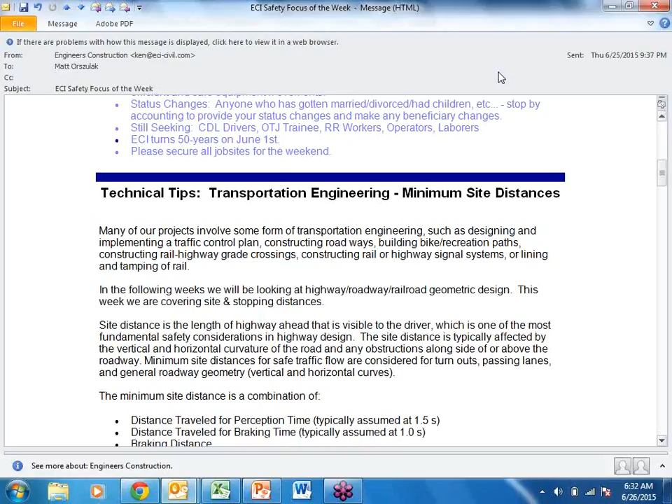ECI turned 50, and don't forget to secure your job sites, especially the holiday week next weekend.

For technical tips, we're changing gears here, away from EPSC measures. We went through all 13 items, so that carried us for quite a while. Now I thought we'd do some transportation engineering things.

Many of our projects involve some form of transportation engineering, such as designing and implementing traffic control plans, which we actually do from the design process to actually implementing it. This includes construction of roadways, building bike and recreation paths, constructing rail-highway grade crossings, constructing rail or highway signal systems, and lining and tamping of track and rail.

In the following weeks, we're going to look at highway, roadway, railway geometric design, starting with sight and stopping distances. Before I start, I'll say that just like highways were critical for curves and all kinds of geometric design, railroads were the ones where this mattered even more. Railroads are critical—you can't just lay out a set of tracks; you have to design it to the right geometry.

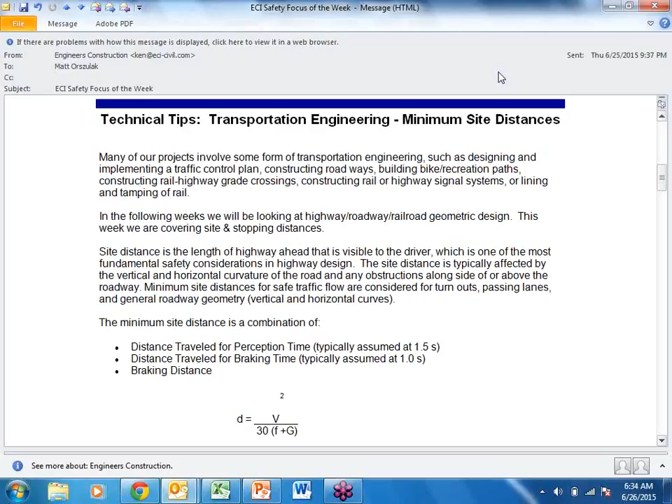Back in the old days with a horse and buggy, it didn't really matter much about all the geometric design we're talking about, like sight distances today. Sight distance didn't really matter in the old days when it was just a horse and buggy. Sight distance is the length of highway ahead that is visible to the driver, and it's obviously one of the most fundamental safety considerations in highway design.

Sight distance is typically affected by both a vertical curve and a horizontal curve of the roadway, and obstructions along the side or above—like if you're coming along a highway and drop below a bridge, you have a limited sight distance because of that. The minimum sight distances for safe traffic flow are considered for turnout areas, passing lanes, and general highway geometry.

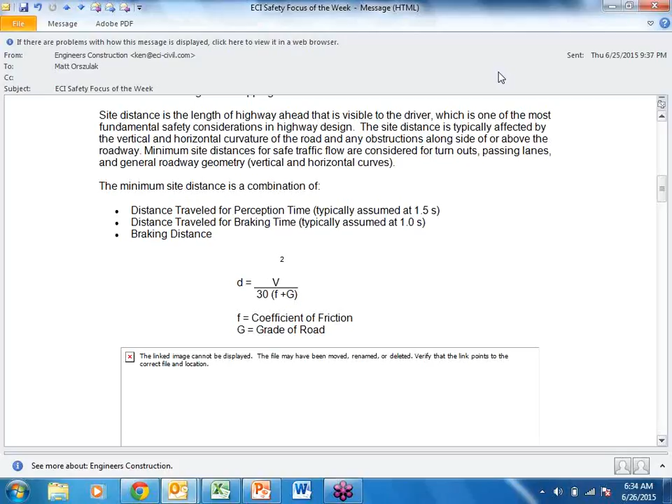It's a combination of three things, pretty obvious when you think about it—I'll have to get that image up. One is the distance traveled for the perception time: something jumps in front of you, a car pulls out in front of you, and you have those few moments to get your head around it and say, oh my God, there's something in the roadway, I've got to stop. Usually you're given a second and a half for design purposes.

Obviously it's on the high side. And then there's an actual time for hitting the brake and getting that reaction time. So there's a couple things combined: the human part, and then the braking part, which is the mechanical part for the vehicle stopping. The braking distance is the velocity or speed squared divided by 30 times F plus G.

F is the coefficient of friction between the rubber and the road, and G is the grade of the road. So if you go upgrade, obviously it helps. If you go downgrade, it makes it worse.

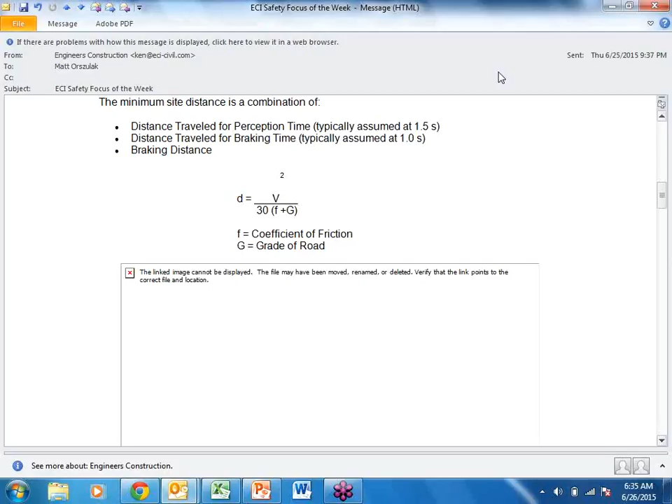Let me go back up to the top and get my... Well, perception might obviously change, your reaction time and seeing things, but probably not too much. One of the big effects is like wet surfaces on the roadway can have a big effect on friction.

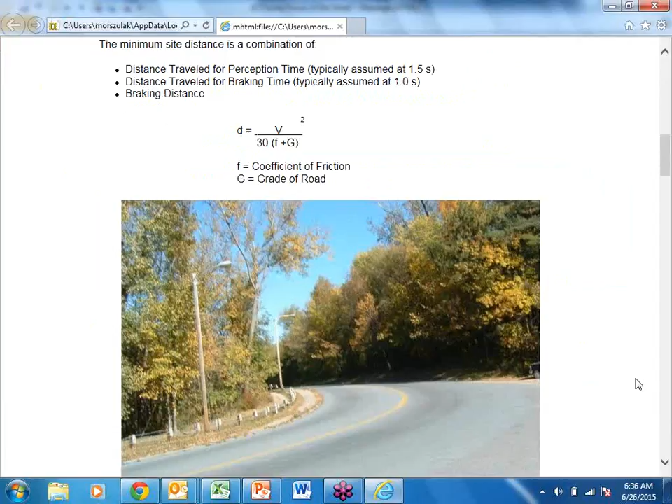There we go. There's my image, and obviously, kind of limited sight distance on a curve like this.

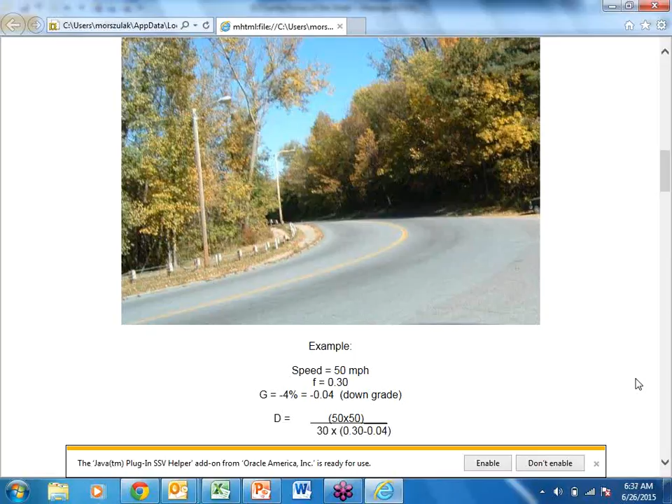Does anyone recognize that curve? Riverside Avenue. Yeah, like E&E is right off to the right, and then it comes out at the Winooski River Bridge. I think the image was taken back a ways, and I zoomed in on it, so it's kind of exaggerated.

Yeah, it's that corner there. That corner, actually, right around the corner is where I parked to go fishing in the salmon hole, and the path is right there. Oh, darn it, gave it away.

So anyway, I gave an example, 50 miles an hour. Typically, the friction is around 0.3 for a dry surface, and a downgrade of 4% or 0.04. You take all those numbers into account, it takes 320 feet to brake in that case, going 50 miles an hour. Plus you add some time, 2.5 seconds of travel time at 50 miles an hour before you even start the braking. That's 183 feet, so all combined, that's 503 feet.

So if you were designing a road and you had, say, a blind spot or something, you would try to keep it back. We actually got called on it, and it wasn't a problem. One of the traffic control plans we submitted for New Haven, for this rail project coming up to turn off from the roadway and onto the site, they questioned the sight distance. The process is to go through this, see what the actual measured distance is, and figure out whether the speeds are going to cause a problem.

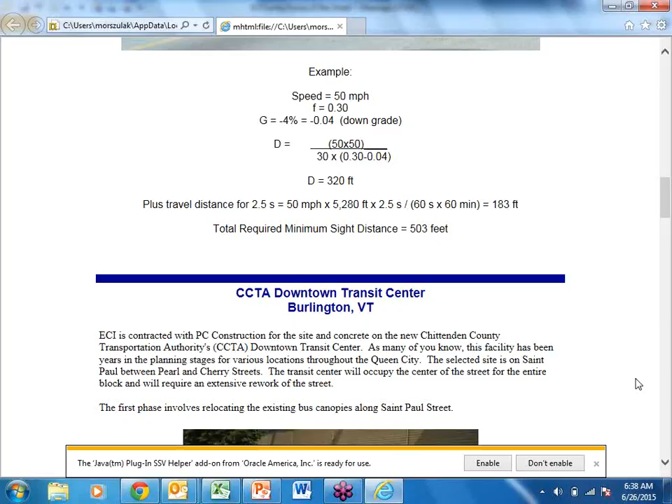And usually in a construction zone, you can also reduce the speed limit. Does that change any by having a heavier vehicle, like a car versus a tractor trailer?

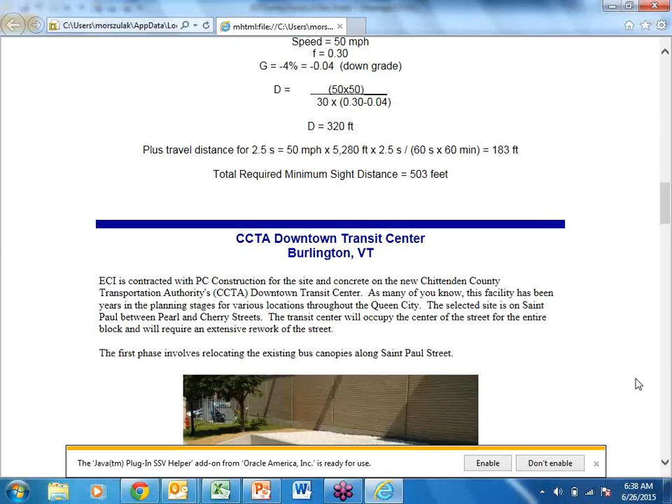It kind of would, but it's mostly a friction thing. So if you can get the actual brakes to lock up, say you're at that point, but obviously a heavy truck would go further. But also, with a heavy truck, he's sitting up higher, so his sight distance is usually greater. So it kind of makes up for that difference.

So for the project profile, we're going to talk about the CCTA Downtown Transit Center. We're contracted with PC Construction. They're the general contractor for the site concrete on the new Chittenden County Transportation Authority, the CCTA Downtown Transit Center.

As a lot of you know, this facility has been years in the planning. I don't know how long we've been hearing about this project going on. There's been numerous sites that they've looked at, and they finally selected a site on St. Paul, between Pearl Street to the north and Cherry Street to the south - one block length next to the big church there, in that square with the big bell tower.

It will occupy that whole street. When I first heard about the job, I happened to be down there and thought, I don't see how they could do it. They got buildings on the east side, a park and a church on the west. Then I looked at the drawings and realized, wow, they're really going to occupy that street.

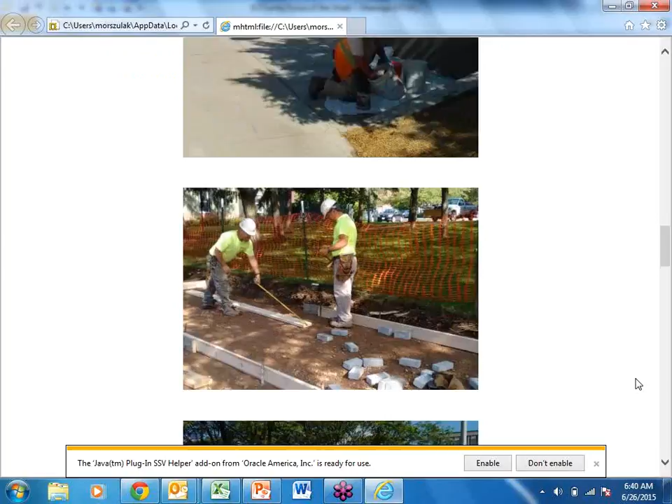One of the first stages is to relocate all the facilities on that section now, which are CCTA bus canopies. They'll have to get relocated so we can occupy the street. That's one of the first steps we're working on.

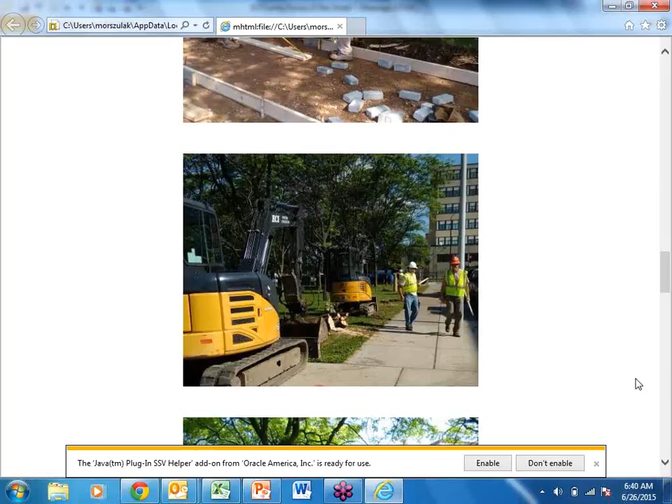This is from about Cherry Street looking north. There's the federal building on Pearl Street, and the big church with the steeples or bell towers. Right now there's all these canopies set up for the bus stop, where the buses are staged and people get on. But now all that's getting relocated while we do our work.

It's going to be a little odd, the traffic pattern. Southbound traffic is going to be on the right side looking at it, so it's flipped around. It'll be a little odd. The job runs through 2016 before it's open. We'll still be working in 2016, but in a different phase. Once they get relocated, they'll start the earthwork, ripping and tearing and digging down, then concrete up, because there's a basement level in this thing too.

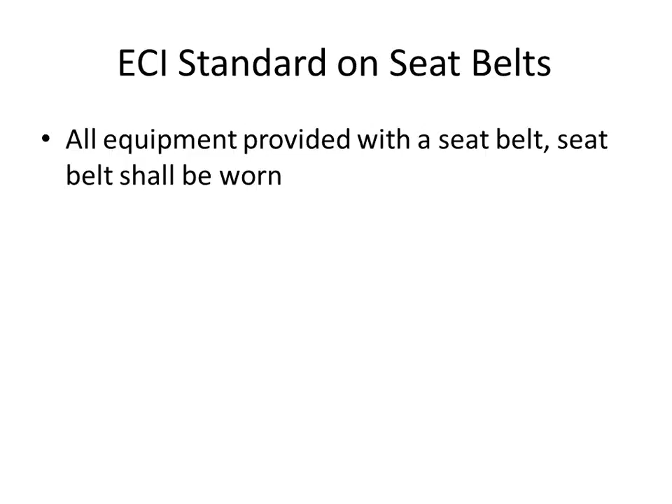We really do it for your own benefit, because if something happens, you might roll over, and the seatbelt is meant to keep you in that rollover cage. If you don't have that seatbelt and something happens, you could get crushed between the ground and the rollover cage. So it's important - it's a state and federal law to have your seatbelt on at all times.

In the state of Vermont, on the roadways, it's a secondary law for everyone non-CDL - they cannot pull you over just for not having a seatbelt, but when they do catch you, they'll hit you with a fine. For CDL drivers, it's a primary offense violation. If they see you without a seatbelt, they'll pull you over and write you a hefty ticket, and sometimes even add points to your license.

So again, it's a good reminder for everybody out there on the roadway. We see it very often, even just driving around here, and it makes me think, wait, if they're not wearing their seatbelt around here, what are they doing out on the main roads? I know sometimes you're just going from here to the backyard, but still, it's that habit we'd like you to get into - just always wearing your seatbelt 24/7.

With heavy equipment, if a piece of equipment does not have rollover protection, a seatbelt is not required. I know that gets confusing because we have some rollers out there that don't have a seatbelt. The reason is if something happens, you can actually bail out since there's no rollover protection there. There aren't a lot of pieces of equipment like that. So if rollover protection is available - which it is on pretty much all our equipment, other than maybe those old rollers - then you've got to have a seatbelt on.

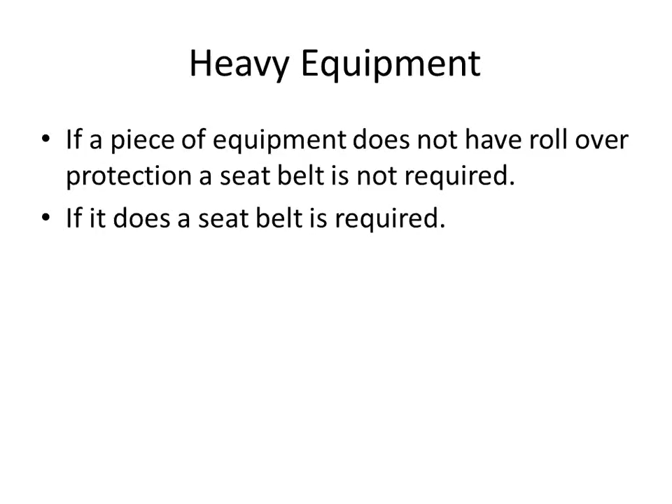Same thing goes for all the forklifts and everything. Those are some of the most dangerous equipment we have, these little Toyota forklifts. They tip over very easily, and if you're not wearing your seatbelt, there's a chance you exit your seat and the rollover protection ends up crushing you. That's why it's important to wear those seatbelts.

Again, it's pretty basic safety training, but this is the stuff that saves your life when you don't expect something to happen. You might have a bad day, you might not be thinking about what you're doing, and you end up out of the limits of the piece of equipment you're operating. I tell you, the seatbelt's going to save your life.

So think about it. If you see someone else not wearing it, just say, hey, you know better, throw that seatbelt on. We can all look out for each other and go home safe each and every day.